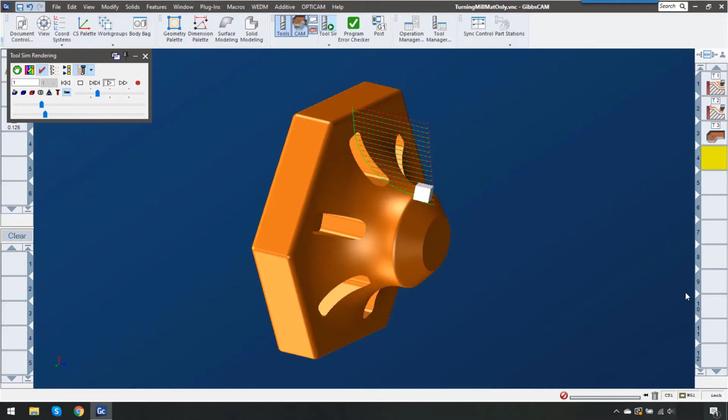This video is going to show the new 3D material only feature in GibbsCAM 14. This feature will calculate the leftover material not just between operations, but between coordinate systems and even between turning and milling operations. We're going to use this example here. So let me get out of simulation and show you how it works.

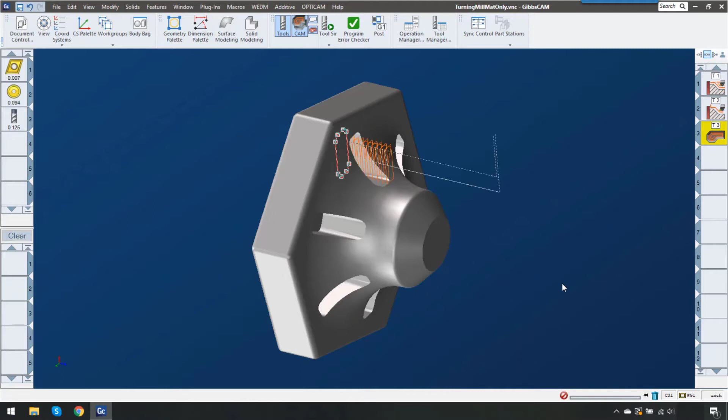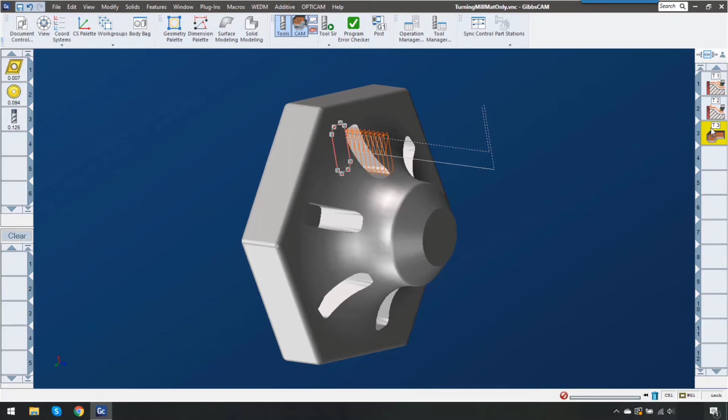So after this part is turned, we're going to end up with a profile, something like this. And because of this profile, you can see that there's going to be a lot of air cutting here to do this pocket. What I want to do is I want to tell GibbsCAM, hey, there was something that happened before this. Let's ignore that material that's not there. And now in GibbsCAM 14, that's really easy to do.

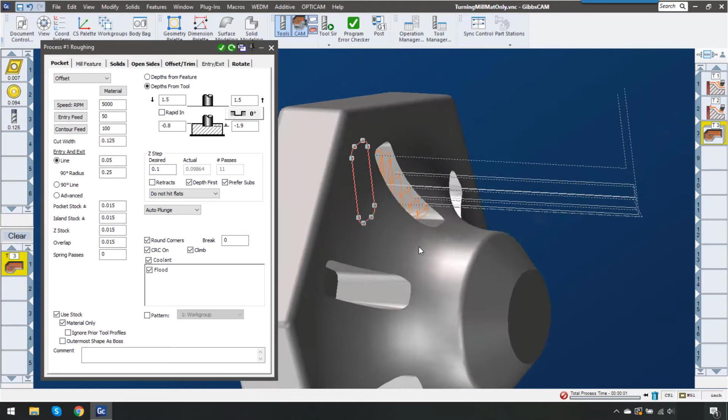So down here at the bottom, we have use stock and just click on material only. This will calculate the leftover material regardless of operation or coordinate system. Now you can see how much more efficient that toolpath is. This is going to cut down on air cutting, which is going to really speed up your cycle time and get parts off the machine much faster.

Now this example was using the difference between a milling operation and a turning operation. Now let me show an example where it's between two milling operations but using different coordinate systems. This milling part, I want to machine on my 5th axis. I need to rough it out and finish it, but the reach on my roughing tool is only about 1.5 inches, and you can see here it's 3.5 inches tall. So I'm not going to be able to get all the way down.

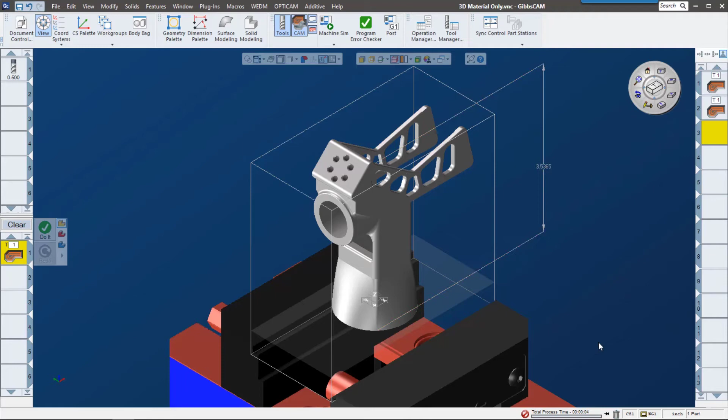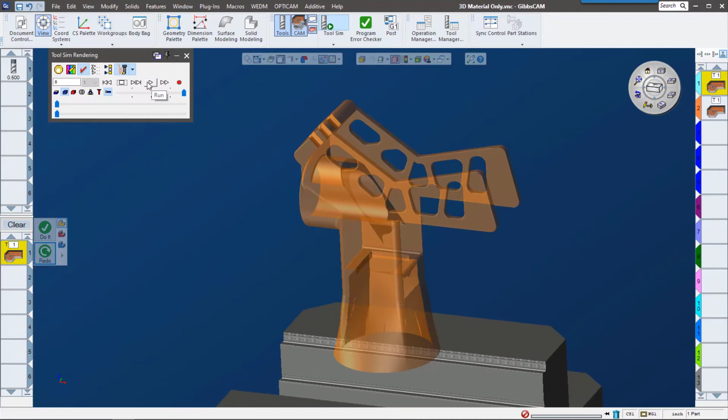Now, the problem is I don't want to have my second tool in this setup have to go through and recut all of the material that it thinks is still there from the previous setup. Now I'll show you an example of that with tool simulation. Here's the toolpath representation from the first tool. Let me continue on to that second tool.

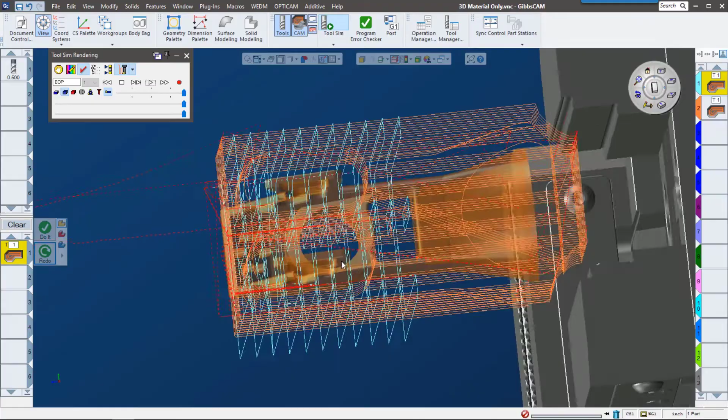So we can see that there's kind of this cross hatching where the two toolpaths actually overlap. If we kind of look at the top view of this, we can see that the second toolpath is actually coming out and trying to clear away the material that's already gone. In GibbsCAM 14, it's really easy to change that. There's this checkbox that says material only. I'm going to go ahead and redo the toolpath.

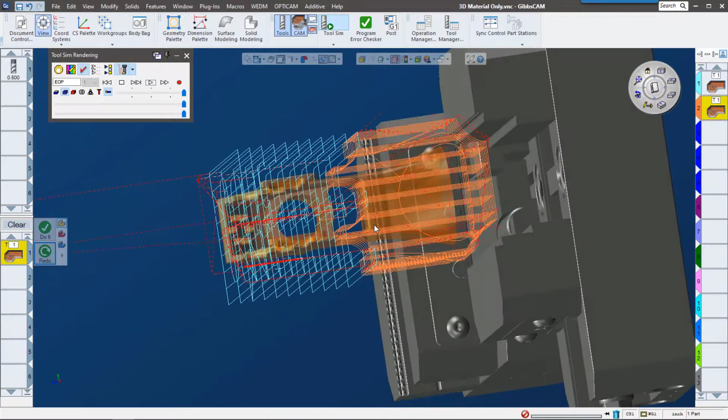Let's go ahead and play it now. Now we can see how that second toolpath only addresses the areas that the first toolpath missed. Let's check this out in Machine Sim. I'm going to go ahead and speed through that first toolpath. So we can see the material that it took away. It took away a good amount of material. Let me back up so we can see the rotation here.

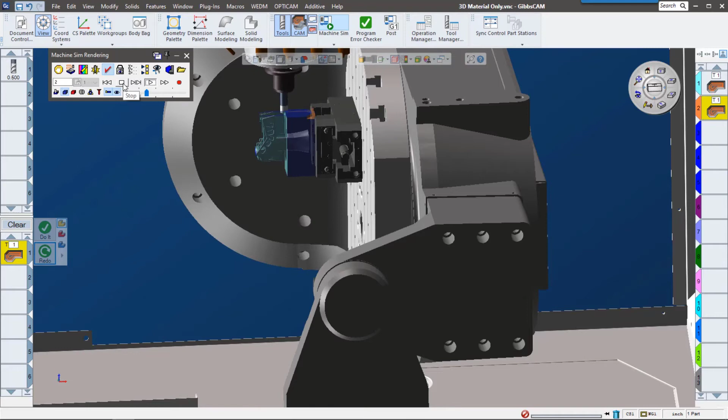So now you can see as I zoom in, that tool is only addressing the material that's left over from that first toolpath.